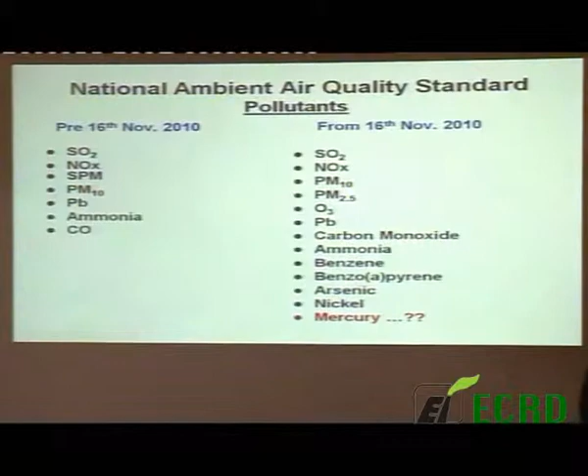...is bound to release mercury as a vapor, which settles around the power plants. Next. Now the ambient air quality; this has already been discussed with Dr. G.D. Agarwal. Now only these two guidelines have been left. The industrial area has been done away with.

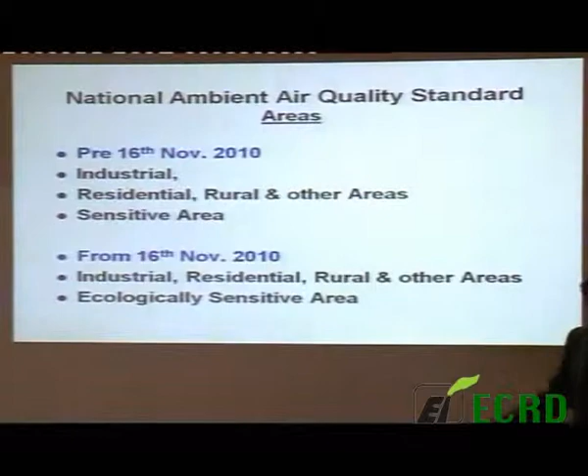Next. Now why do we monitor ambient air quality? Because we have to comply with the standards; the standards have been set, certain limits are there. We cannot see by the naked eye whether the pollution is there or not, what the level is. If the level is high, we have to identify the sources and do the remedial measures, the control measures, the control equipment to be installed.

So we have to monitor the ambient air quality depending on the situation, to assess the health effect and potential damage to property, and to determine the background level of pollution. Suppose you are going to set up an industry; under EIA the baseline quality is to be established. What is the status before the plant comes up and what is the status after the plant is commissioned.

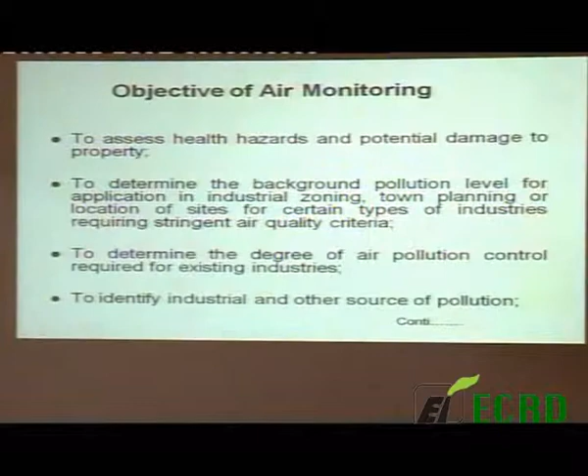That is done by mathematical modeling. The predicted values are superimposed on the baseline, and we come up with the ultimate quality of the ambient air. So we can see and foresee the management tools.

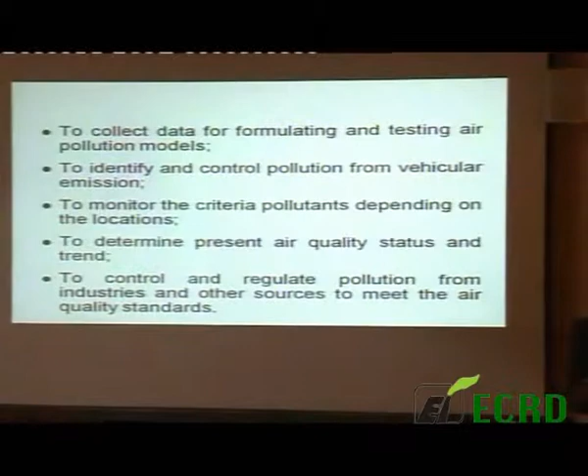The criteria pollutants depend upon the location; certain pollutants are already given here. Those pollutants which are not given here, certain ones are asked to be monitored depending on the industry. Like in the petroleum industry, you have to monitor the VOCs and the hydrocarbons also, as required by the local state pollution control boards.

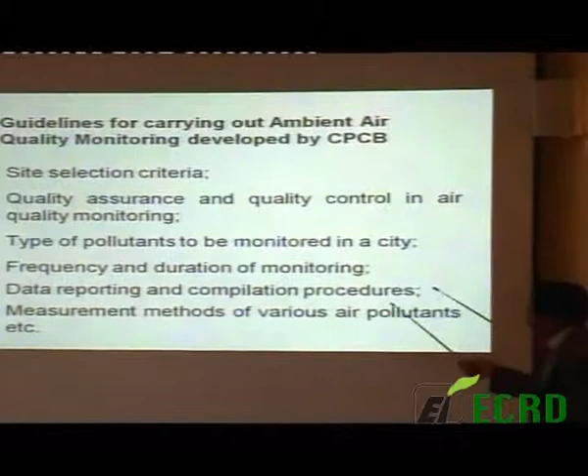Now we come to site selection. The site selection criteria is important. Quality assurance and quality control in air quality monitoring is essential. Type of pollutant to be monitored in a city: if you are monitoring in the city, we have to look for the vehicular emissions, because in the city, the urban area, the major pollution is from automobiles, besides the industrial locations.

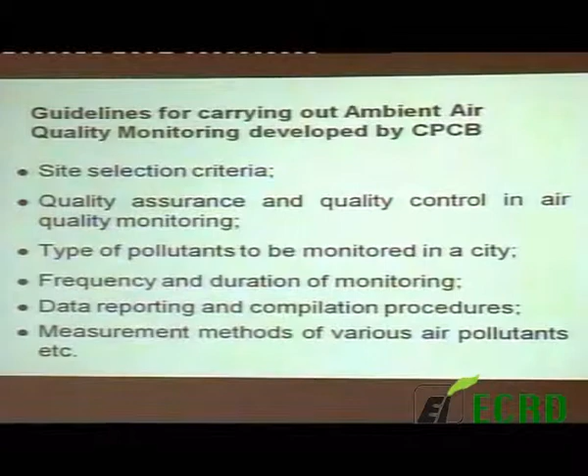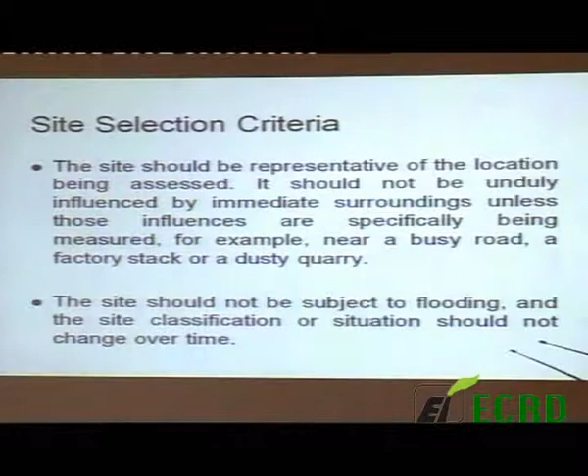Next. The site should be representative of the location being assessed. It should not be unduly influenced by the immediate surroundings, for example a busy road, a factory stack or a dusty quarry, unless that influence is specifically being measured. The site should not be subject to flooding, and the site's classification or situation should not change over time. Next.

Now see, certain other requirements are also considered: the accessibility of the site, power requirements, safety. These should also be considered when fixing the monitoring station. We also check how much time electricity is available. We can monitor in the absence of regular electric power with generators, but generators have their own limitations because they cannot work continuously for 24 hours.

One has to feed them with fuel, and the fuel will also emit certain pollutants which can interfere with the local air quality. If we have to do the monitoring with the help of generators, the generators should be kept downwind, at least 100 meters away from the samplers.

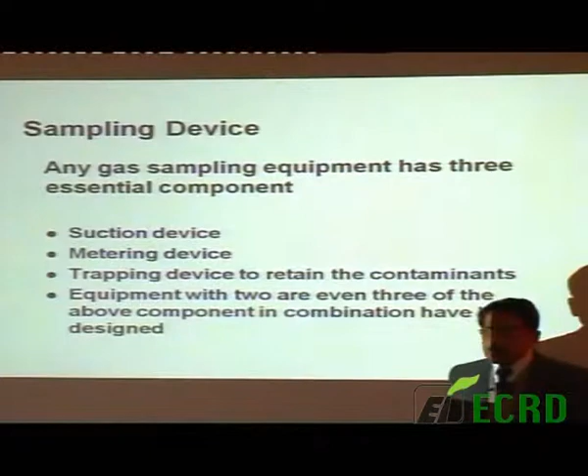Now coming to sampling: suppose we want to sample any environment, we need three things. First, a suction device, a vacuum device; and a metering device, showing at what flow rate we are drawing the air, because ultimately we are interested in knowing the exact volume of air which has been sucked. And then a trapping device.

If we are working on particulate matter, it may be a filter. For gases, we have to impinge or adsorb on charcoal. If it is an organic compound, it has to be adsorbed on silica gel or activated charcoal. If it is an inorganic gas, it has to be absorbed in a proper solution, which can be subjected to quantitative analysis at a later stage.

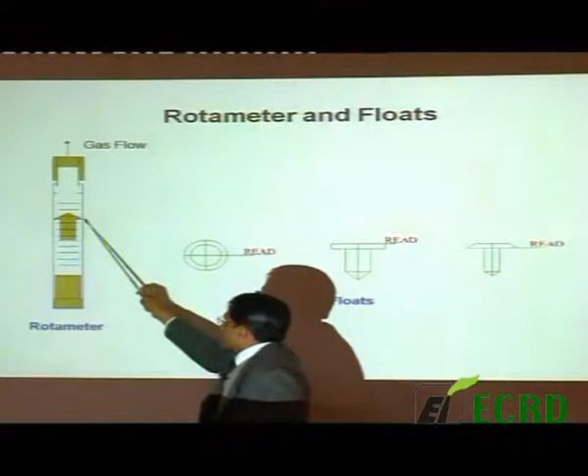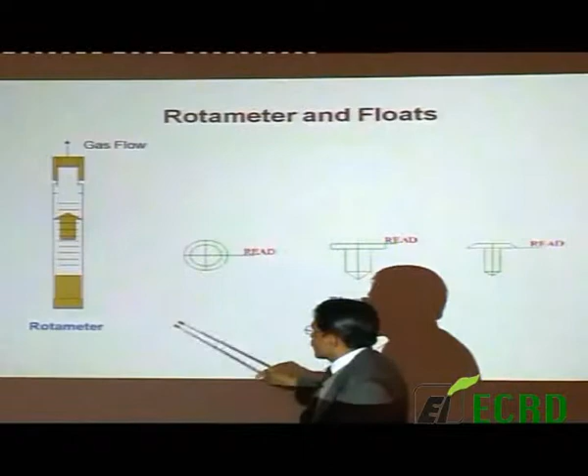Next. This is one of the important facts: where to take the reading. Whether we have to take the reading at the top, this point or this point. First of all, the reading should be taken at eye level, straight. If you take a reading from here, you will find a higher value. If you take a reading from here, you will find a lower value. So one should know the exact flow rate of the rotameter.

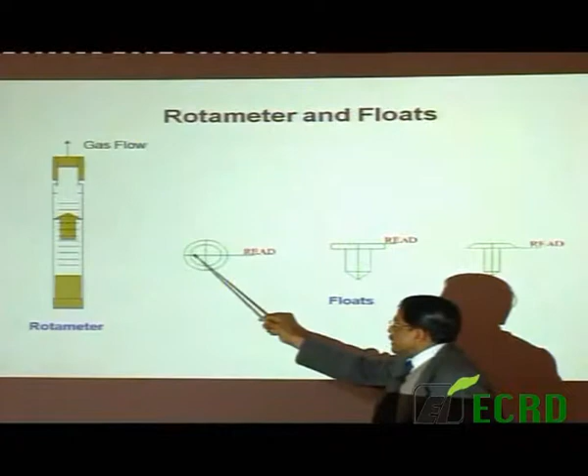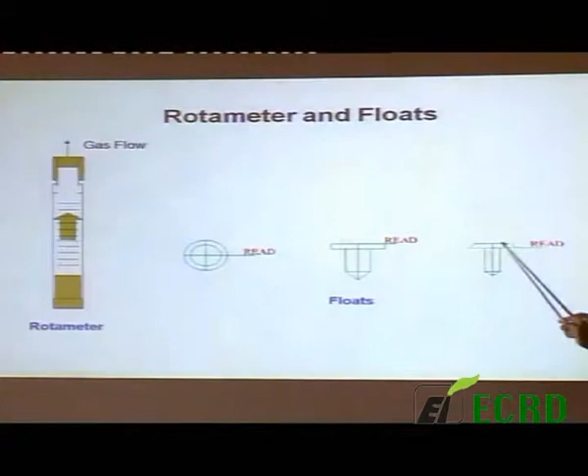There are various types of rotameters available in the various machines manufactured by different manufacturers. Suppose we have to take the reading at the widest part of the float. This is circular; you have to take the diameter, the highest point. Here, this is a float, we have to take the reading at the upper float. And in this type of float, we have to take the reading here, at the widest part of the float.

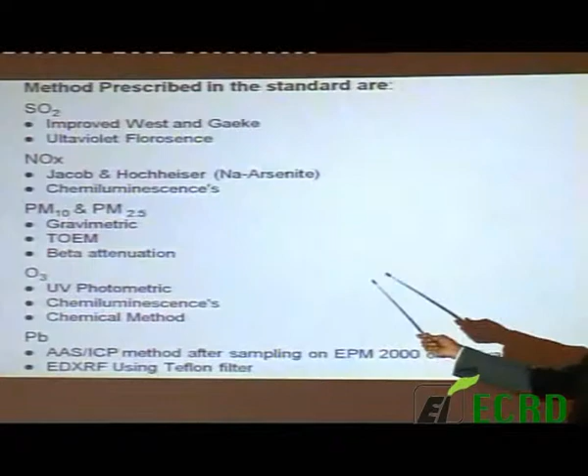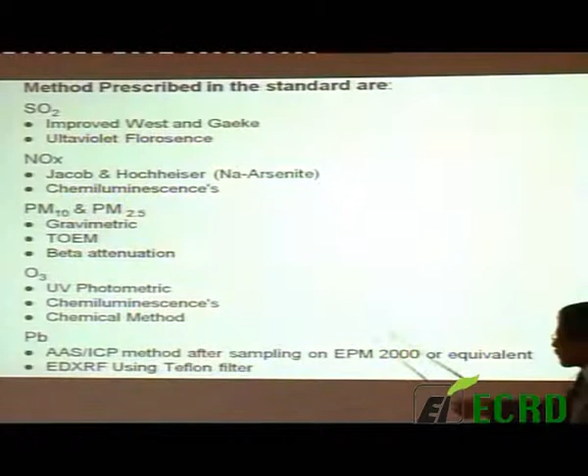Next. Now the methods prescribed in the standards are improved West and Gaeke method, ultraviolet fluorescence, Jacobs method, online laser direct reading, chemiluminescence; for PM10 and PM2.5, the gravimetric method, TEOM and beta attenuation. Here TOEM is wrongly printed in the gazette. This is TEOM, tapered element oscillating microbalance. Then ozone: UV photometric method, chemiluminescence and chemical methods are available.

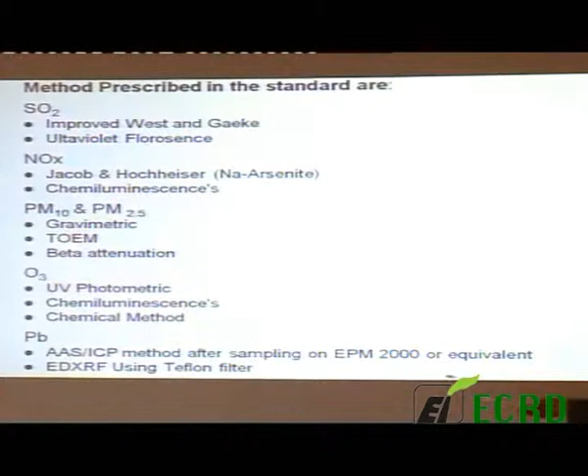For lead, it can be done by AAS, ICP, or EDXRF using Teflon filters. Next. CO can be monitored by non-dispersive analyzers. It is recommended by the board, but the BIS standard says it can be monitored by a number of methods. But those methods are not realistically possible. One method is a CO detector. A CO detector has a limitation: it cannot monitor the level present in ambient air. Generally, in ambient air, CO is less than 1 or 2 ppm, which is not possible to monitor with detector tubes. And besides, even if we can monitor those limits, the results are about plus or minus 10 to 20%.

One CO method given in the BIS method is iodine pentoxide. If you monitor through the iodine pentoxide method, you need to keep the sampling tube at 175 degrees centigrade in the field. So you have to carry a small oven in which you can put this tube and maintain 175 degrees centigrade, which is not possible.

Then we can have gas sampling bags. Any gas sampling bag will not do. The Mylar or Tedlar bags, imported from the USA by SKC company or some equivalent make, do not interfere with the pollutants. You collect about 5 or 10 liters with a low volume sampler in a gas bag, take the bag into the laboratory and do the analysis by GC-TCD, or by converting it with a catalytic converter with FID. CO can be done.

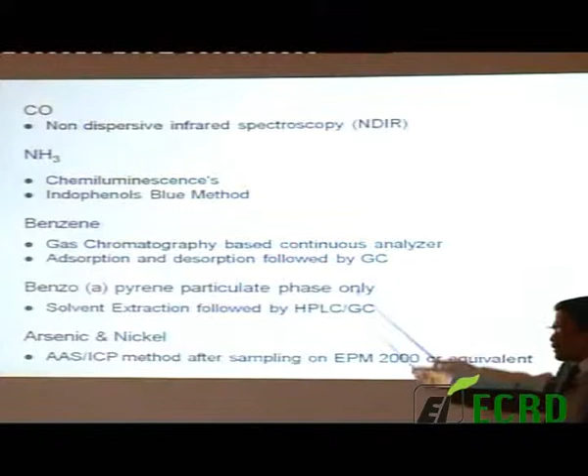Then benzene: a gas chromatography based method, and a continuous analyzer is available. Adsorption and desorption followed by GC. Benzo(a)pyrene is in the particulate phase; it can be extracted by solvent extraction and quantified by HPLC or GC, which can be covered later on. Arsenic and nickel by AAS and ICP. Next.

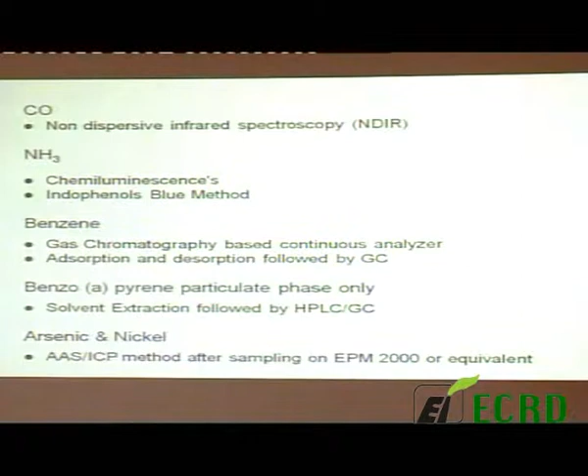In the type of sampling, we are interested in monitoring the average quality, 24-hour or annual averages. For that matter, we have to take the readings specified. But at certain times we are interested in episodic sampling, grab sampling, excursions. Suppose we are an enforcement agency going to check an industry. We want to take a grab sample, in a short duration; we call it a short duration sample. The batch sampling and the baseline data is collected over 24 hours. Next.

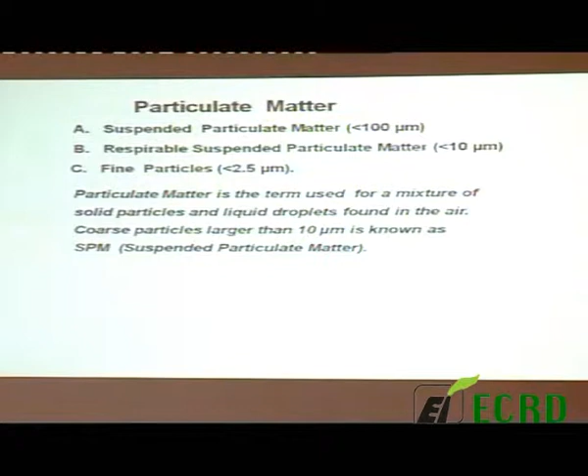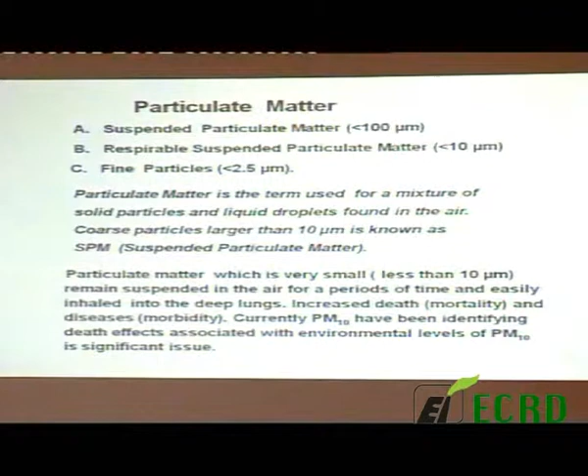Total particulate matter, all particles suspended in air less than 100 micrometers, is called suspended particulate matter. Respirable suspended particles are less than 10 micrometers, and fine particles are 2.5 micrometers. Next. As per the new notification, it measures PM10 and PM2.5. A known volume of air is passed through an initially weighed glass fiber filter paper, GF/A, of size 8 into 10 inches. We use any normal filter paper for gravimetric methods.

Suppose one wants to monitor arsenic, lead or trace metals. When you are going for trace metal analysis, you have to monitor lead, arsenic and nickel. But people who have ICP at their end can monitor a number of parameters in one go without any extra effort. If you want to monitor PM10 on the filter paper, then you have to use EPM 2000 filter paper. EPM 2000 is a low matrix filter paper with low background metals.